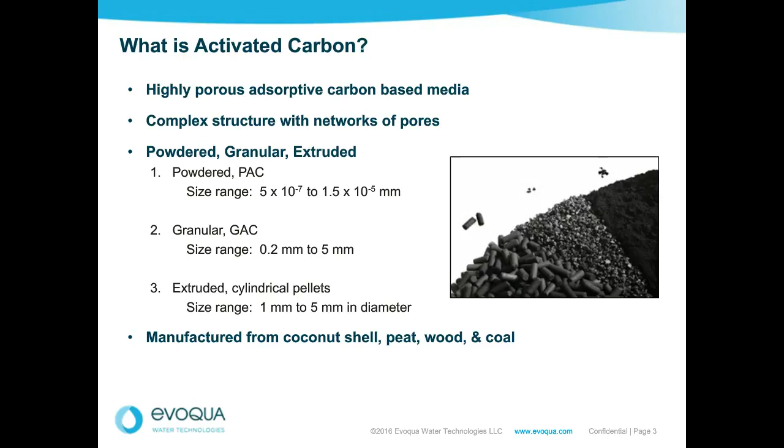So let's talk a little bit about how activated carbon is manufactured. There are two means to manufacture it. The first one is steam activated. Now, steam activated carbon is typically used with coconut shell based or coal based carbons. And the process of steam activation occurs in two steps. The first step is called carbonization, where it typically occurs at around 1300 degrees F. And what we're really trying to do in this step is we're trying to dehydrate the material and devolatilize it.

The second step in the steam activated portion is the actual activation. And this is where we utilize steam at temperatures of around 1400 to 1800 degrees F. And what this does is help enlarge the pore structure, increase the internal surface area, and make it more accessible, meaning more accessible for removal of constituents. So you can see now that with this activation step, we have some ability to vary the pore sizes, therefore allowing us to potentially produce carbon specific to remove specific constituents that we're looking for. So an example of this would be if we needed to have a more open pore structure to adsorb smaller molecules from, say, a solution, such as water purification.

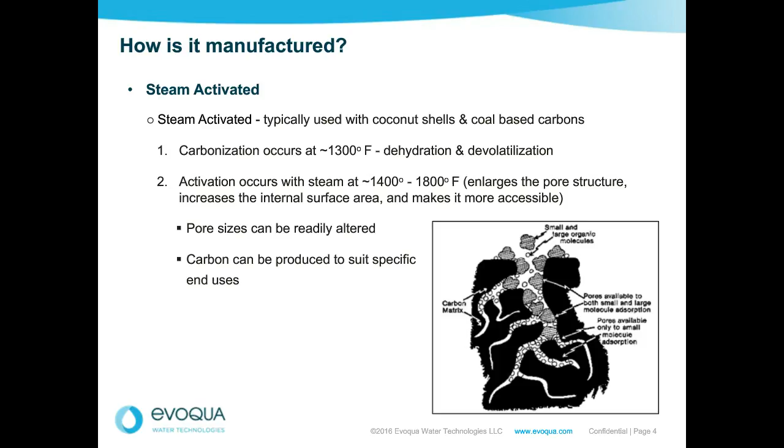So now let's talk about the second way that activated carbon is manufactured, and this is chemical activated. So chemical activated carbon is typically used with wood and peat-based carbons. And again, this has two steps. The first step consists of mixing the raw material with an activating agent. And this activating agent is typically zinc chloride or phosphoric acid. And what these activating agents do is they cause the material to slightly swell.

Now the second step of this process, the carbonization, occurs at temperatures around 700 to 900 degrees. And the chemical that we used in step one acts as a support, and it does not allow the char that's produced when we heat it up to shrink. Therefore, it kind of keeps the intrinsic pore network open and accessible to constituents.

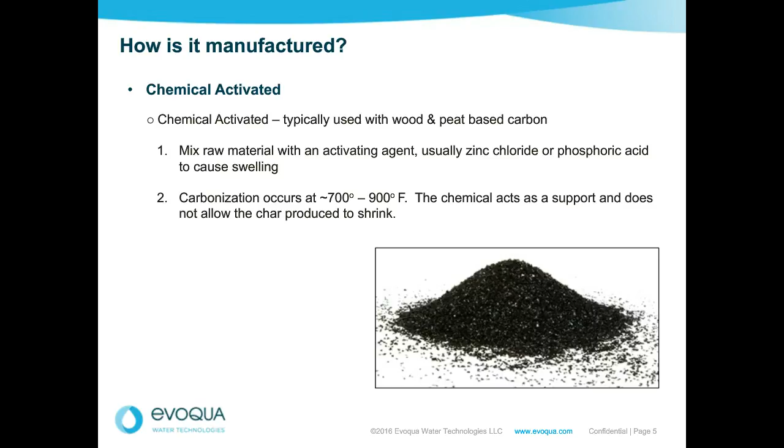So now we're going to talk a little bit about some of those key properties of activated carbon. And the first one is this intrinsic pore network. The porosity of activated carbon offers a vast surface in which adsorption can take place. So looking at the picture, the lattice structure of activated carbon allows for the removal of impurities from gases and liquid media through a mechanism called adsorption.

So let's talk a little bit about what adsorption is and the two types of adsorption. So adsorption is defined as the attachment or adhesion of atoms, ions, or molecules, which we typically call adsorbates, from a gas or a liquid onto the surface of an adsorbent, which in our case is activated carbon.

Now, adsorption typically occurs in two manners. There's physical adsorption, which are weaker forces, and they're typically called van der Waals forces or London dispersion forces. And then there's chemisorption, which is relatively strong forces of attraction, where in some instances you have actual chemical bonds between the adsorbates and the chemical complexes right on the surface of the granular activated carbon.

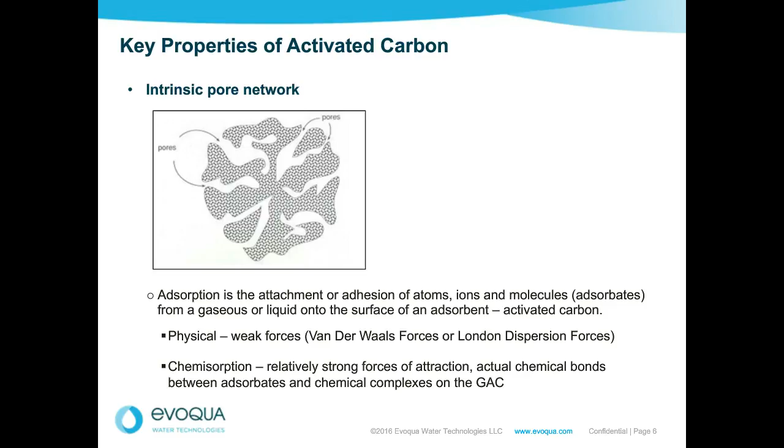So moving on to a couple other key properties of activated carbon, the next one is surface area. And it's safe to say in general, the higher the internal surface area, the higher the effectiveness of carbon. So if we take a look at the image right below that bullet, a spoonful of activated carbon equals the surface area of a soccer field. So you can imagine that it's an incredible amount of surface area in just one spoonful, let alone a carbon tower that may be several feet in diameter and several feet high.

The next property we're going to talk about is total pore volume. And that's typically measured in milliliters per gram. And what that refers to is all the pore spaces inside a particle of activated carbon.

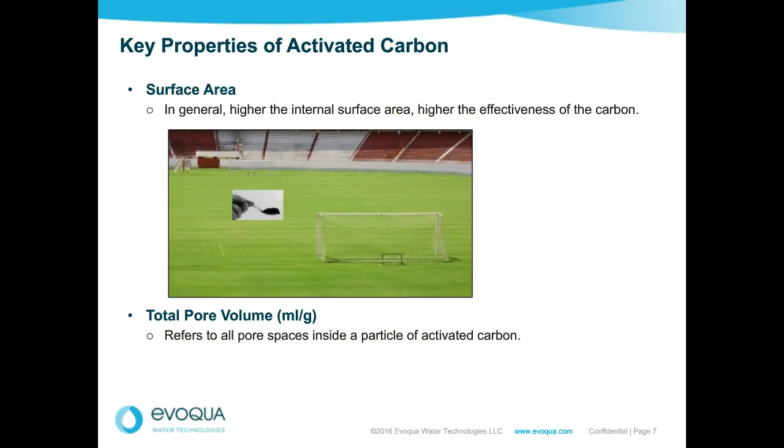So one other final key property that we're going to talk about is the pore diameter of the carbon itself. And there are three categories of the pore diameter. We look at micropores, which are a diameter of less than 20 angstroms. We have mesopores, which are a diameter of between 20 and 500 angstroms. And then we have macropores, which are a diameter of greater than 500 angstroms.

So if you look down at the image on the right, you can kind of get a feel for where some of these pores may be located. So maybe up near the surface of the activated carbon, we could have those larger macropores, and those would be the pores that maybe catch some of the larger color molecules. And then maybe as we go deeper into the activated carbon, you would get into the mesopores and potentially even the micropores. So that image kind of shows you that intrinsic network. It really gives you a good idea of how complex the activated carbon can be.

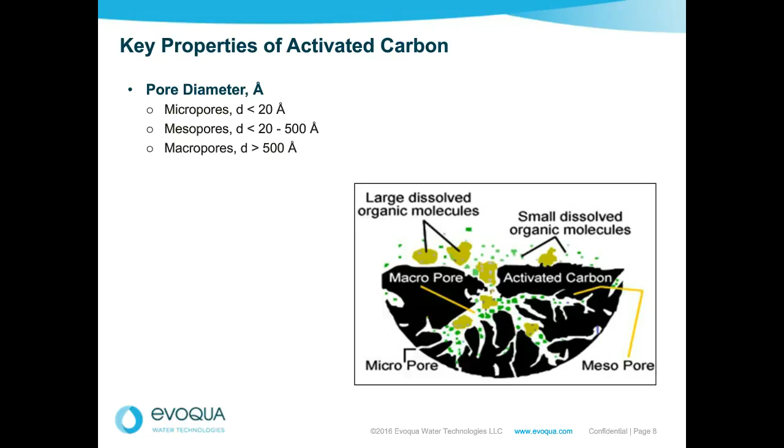So let's talk a little bit about why carbon is really important to us in the food and beverage industry. Why are we really even using it? Well, carbon really helps us remove a lot of items, and the first item it helps us remove is chlorine and chloramines. Many municipalities or sources of water utilize chlorine and chloramines for disinfection. So carbon is a means to help us remove that excess chlorine, which would help us protect downstream equipment that's maybe sensitive to that chlorine or chloramine.

It also helps us remove organics. And some of the organics that we're typically concerned with are the trihalomethanes, known as THMs, the haloacetic acids, HAAs, and just other general organics. The third thing that carbon helps us remove is sometimes odors, or even the fourth item, some off tastes. So carbon has a lot of uses for us in the food and beverage industry, and that's why we utilize it a lot.

And it is worth noting that carbon is considered the best available technology for removing small molecules such as THMs. So if you have a THM concern or a challenge, maybe carbon is the way you should go.

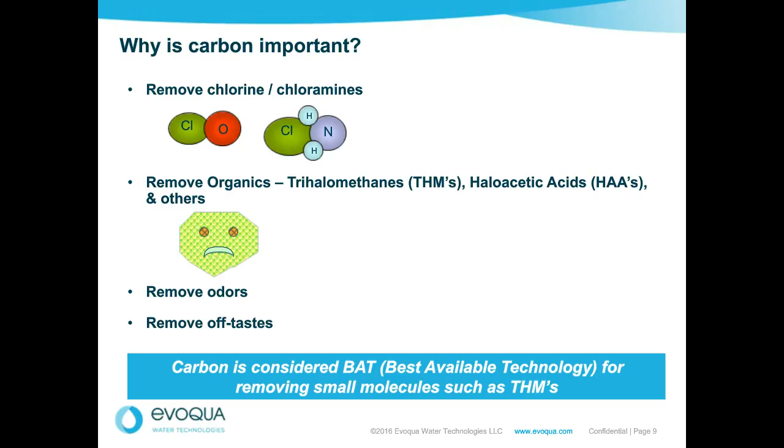So we're going to talk a little bit now about exactly why sanitizations are needed of my activated carbon. I have this tower. Why do I need to sanitize it? Well, we really need to sanitize activated carbon because we want to prevent microbial contamination within the product, which could ultimately improve the system operating efficiency.

You see, if we have bacteria growing in our carbon or carbon tower, it can cause some extreme issues. And those issues could be that the carbon itself gets blocked or clogged. Therefore, all those sites and that intrinsic network that you had seen images of before really become unusable, and then whatever you're trying to remove could potentially flow downstream. So we really want to protect the carbon, keep those sites open and available to remove whatever constituent we may be looking to remove.

So the other point about sanitizations is that without a proactive organism control, our carbon tower can become a source of bacteria growth. And this growth can create potential biofouling, which could in turn affect our equipment downstream. For example, if we have biofouling growing within our carbon tower, it could affect an RO that's downstream of that, therefore causing us to perform more maintenance on the RO. So we really want to have proactive sanitizations of the upstream equipment to protect our downstream equipment.

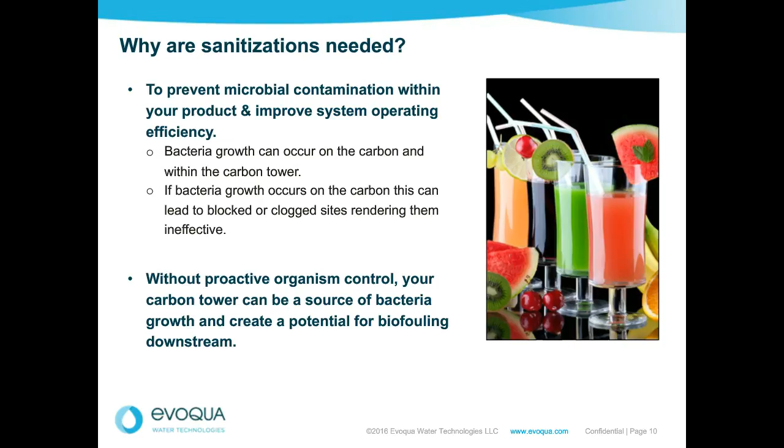So Freddie, I think it's time for our first polling question. Yeah, excellent. Thanks for that, Jim. So that's right. It's time for the first poll that we'll be running in today's session. So audience members, if you could please select the answer that is relevant to you and then just click on submit. So the question is, how often do you sanitize your carbon tower or towers? So a few options there for you: daily, weekly, monthly, biannually, or never. So audience members, if you could select your answer now.

And Jim, perhaps you could briefly comment on the question just to give our audience a bit more time to vote. Yeah, sure, Freddie. So this is always something, if you have activated carbon towers, you may even have standard operating procedures. So we just put some samples, whether that be daily, weekly, monthly, biannually. Hopefully nobody's really selecting never, so it'll be kind of curious to see what the results come out to be.

Perfect, thanks for that, Jim. Let's have a look at the results. Well, in fact, we did get a few people who put never down, but the leading answer there with 40% is biannually. What do you reckon, Jim, more or less what you're expecting? Well, yeah, I guess I'm not surprised. I'll address the monthly one. I would think that maybe I would see a lot more on the monthly sanitizations.

But if you do have more trihalomethane issues and concerns and haloacetic acids, I can see somebody going to a biannual basis. And again, I see some of the answers are even at 10% for weekly. So it's good that we have a lot of people sanitizing. The never ones, I'd just be curious on the situation that they're using the carbon in, and why they aren't sanitizing. Maybe there are circumstances, but I really couldn't address that one until I further understood what they're trying to do and remove with the activated carbon.

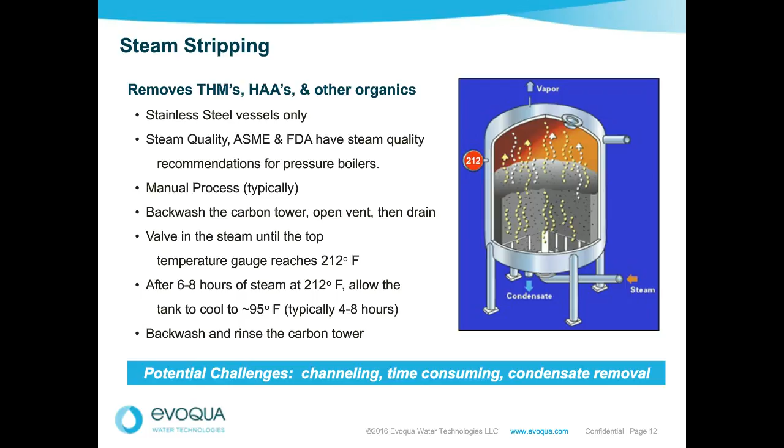So now that we talked about steam stripping, we're going to jump into the sanitization of activated carbon towers. Now, there are 3 ways to sanitize. The first one is going to be steam, which we'll talk about. The second one we'll talk about is caustic sanitization, and the third is going to be hot water sanitization. So let's talk about steam sanitization. Again, the goal here would be to sanitize the carbon and the vessel itself. And it's very similar to the process of steam stripping, which we talked about before.

Again, the preference here is to utilize stainless steel vessels, and again, be mindful of the instrumentation that you have within that vessel, because it needs to be able to handle the higher temperatures, the 212s that we're talking about. The concern about steam quality is also there again, so please refer to the ASME and FDA for steam quality recommendations. And again, as described before in the steam stripping, I'm just going to highlight some of the steps here, and please feel free to talk to your vendor manufacturer or a trained service provider for the additional specific steps for your process of steam sanitization.

But this process is, again, a manual process. We're going to backwash the carbon, open the vent, and then ultimately drain the carbon. Once we have the carbon drained, very similar to the steam stripping, we're going to valve into steam. We're going to bring it up to temperature to around 212. But here's the difference now on the steam sanitization as compared to the steam stripping. We don't have to run the steam as long. Typically, we'll run it for about an hour at around 212.

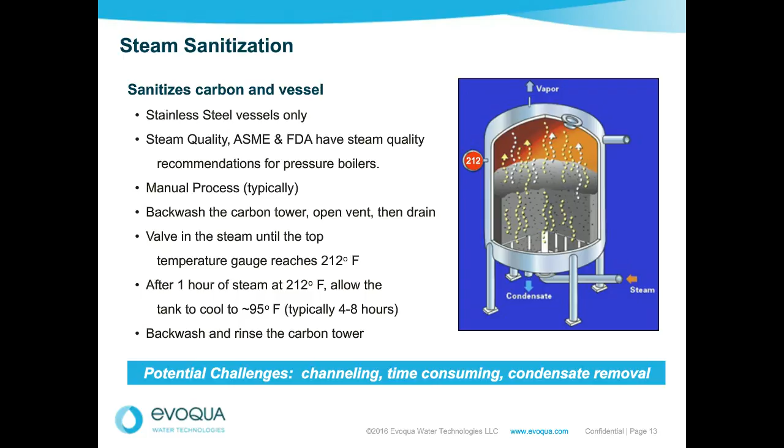So let's move to our second type of sanitization. This is a caustic sanitization. And this again will sanitize the carbon and the vessel itself. But caustic sanitization is really only used when we have a seriously contaminated carbon. And we really want to be careful about utilizing this means to sanitize, because we only really recommend experienced personnel to do this. And if you don't have any experience with this, please contact a company that has previous experience,

because part of this process involves obviously the use of caustic, which can be very harmful, and you're also utilizing acid. So there's a lot of potential harms out there. So we'd really only advise this if you have experience doing it, and if not, please reach out to somebody who does have the experience.

So leading into the potential challenges, like I talked about already, it's a dangerous process, but sometimes it has to be done. We just have to use the proper personal protection. It is time consuming as well. And in this instance, you could potentially have issues with the removal of the effluent that you've created during the sanitization process.

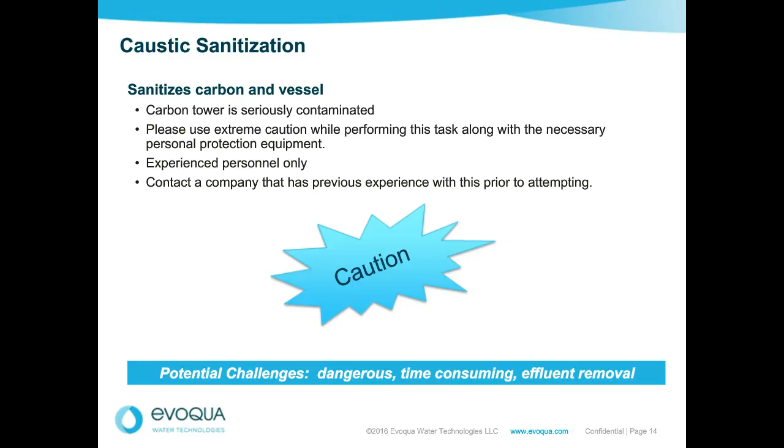So we're going to move to our final sanitization capability, and this is hot water sanitization. Again, it's used to sanitize the carbon and the vessel. We typically recommend this to be with stainless steel vessels only. Now, I'm not saying that it cannot be done with non-stainless steel carbon towers, but you really need to, again, contact your vessel manufacturer or even contact myself, and we have to do a little bit more homework on whether the vessel can actually take the temperatures that we're going to talk about below.

Now that we're not using steam, our concern is with water quality. And we do need to use some quality water to hot water sanitize it. And we have clients who've typically used filtered water or RO permeate water or some other means of water. And traditionally this, like the other processes, has been a manual process, which really starts with a backwash. Then once we've done the backwash, we can come into doing a recirculation for about 1 hour.

Now the temperatures we're talking about here are only 185 degrees, so less than our 212. And that's why I made mention that there's a possibility to do non-stainless steel carbon vessels, but we really have to see what that lining is on those vessels. So after we recirculate for about 1 hour at the 185 degrees, we want to allow the carbon tower to cool again, and that's to come back down to that 95 degrees F. And again, that takes about 4 to 8 hours.

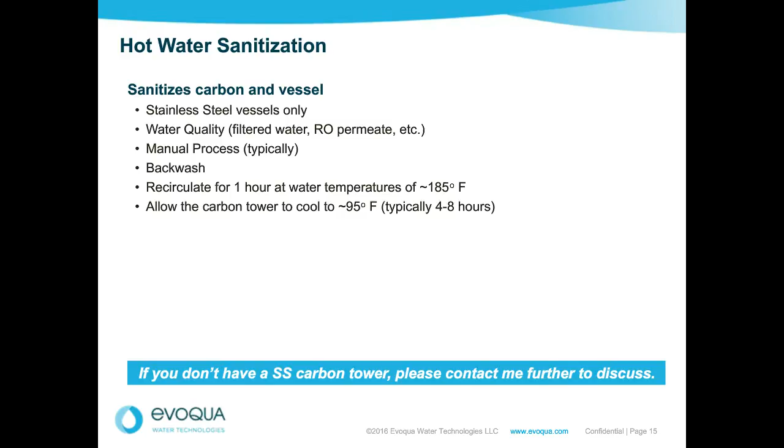So now we're going to move into what an ideal sanitization should look like. So the first thing we think about when we think about an ideal sanitization is we'd like to think that it's simple. One push of a button to initiate. That it's automated for a complete backwash, and you're able to sanitize to your exact requirements. We also like to think that an ideal sanitization can be efficient and sustainable.

And what this means is that we'd like to be able to sanitize the carbon while it's suspended. And what this does is this exposes all of the surfaces that we had talked about before, that intrinsic pore network. So by sanitizing it while it's suspended, we really expose all of the carbon surfaces. The sustainable portion, it helps save up to 75% of the backwash water. That would be an ideal sanitization, that I'm not using all the water that I traditionally would use.

Another aspect of ideal sanitizations is heat. The heat is applied when we suspend the carbon during a backwash, kind of like what I just talked about just above. And what this really does is this maximizes our bacteria kill rate. Again, we have all those surfaces exposed, and it allows that hot water to hit all of those areas

and maximizes that kill rate. And by expanding the bed, we eliminate a lot of those issues and concerns of channeling that we had talked about before with steam, where we really don't know if we're really getting the entire bed. But once we expand a bed, we have a pretty good confidence that we're getting to all portions of the activated carbon.

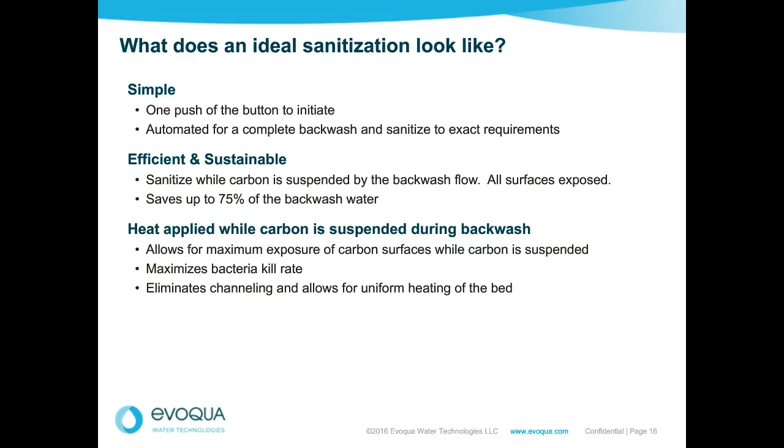Now, the final thing about ideal sanitizations is we'd like that system to be flexible. And what I mean by that is we'd like to be able to either do a single column or multiple carbon towers. We'd like to be able to potentially extend the runtime of this system really at no extra consumption of water and with a minimal energy increase. We also would like to be able to retrofit it to recirculating heat to sanitizing potentially polishing filters and UVs that might be in the system.

And we've seen in the previous sanitizations, in the previous slides, that there is a long period to cool down the tower. And in an ideal sanitization, we'd like to limit those 4 to 8 hours and reduce them. So there's systems that can be fitted for immediate cooling that can allow that 4 to 8 hour window to shrink, therefore getting us into operation sooner.

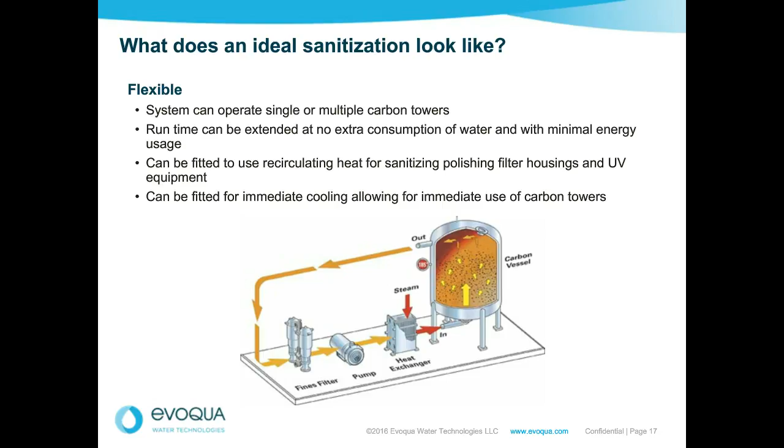So now I think we are ready to move on to our next polling question, Freddie. Yeah, great stuff. Thank you, Jim. So it's time for the second poll that we're running in today's session. So exactly the same process. Audience members, if you could please select the answer that is relevant to you and then just click on submit. So the question this time is, do you perform your own carbon tower sanitizations? You've got 3 possible answers there. Yes, with steam. Yes, with hot water. Or no, we have a service provider handle them. So audience members, if you could select your answer now, and once again, Jim, perhaps you could briefly comment on the question to give our audience a bit more time to vote.

Yeah, sure. So this is a pretty straightforward question. And it all really depends upon the personnel that you have available at your facility. But we're really looking to see whether you're performing them with steam or hot water, or you have a service who can come in, and we know that there are services who can kind of roll up their equipment and perform that sanitization for you. So we're really just trying to poll and see where our audience is at with this type of question.

Okay, great. Let's have a look at the results. So leading answer by far there. So with 64%, that's yes with steam. What do you reckon, Jim? Well, I'm not overly surprised by that. I would have guessed that the steam was probably the leading candidate here. And then I see that we do have some people who utilize hot water as well. And then, like I had said prior to the question being answered, we do know of service providers. So not surprising on the spread here, but it's good to see that we have a lot of them utilizing steam.

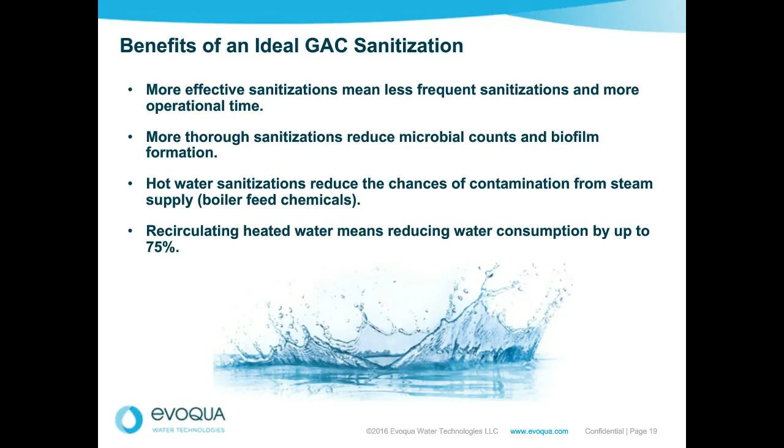So I just want to move along to our conclusions now and just kind of review what we had talked about. So at first we talked about some of the basics of activated carbon, the key properties such as surface area and that intrinsic pore network. Then we talked a little bit about the importance of GAC in the food and beverage industry, where we talked about it being able to remove the chlorine, the chloramines, the THMs, the HAAs.

We then moved on to talking about why the sanitizations are really required. Then we started to talk about steam stripping and the difference between steam stripping and steam sanitization. And remember, the real difference with steam stripping is that we're really trying to remove the trihalomethanes, the haloacetic acids, and it's the duration that we're steaming. We're steaming in that 6-hour range as opposed to 1 hour where we'd be steam sanitizing.

So then we moved on to the various types of sanitizations, which would be steam, caustic, and hot water. And again, I just want to point out that the caustic one, please consult sources. It's a dangerous process. It can be done, but just use a lot of caution doing that. And then we talked about the hot water sanitizations as well. And then we kind of rolled into talking about what an ideal sanitization looks like, whether it be simple, and it be efficient and flexible. And then we talked about what are the benefits of that ideal sanitization.